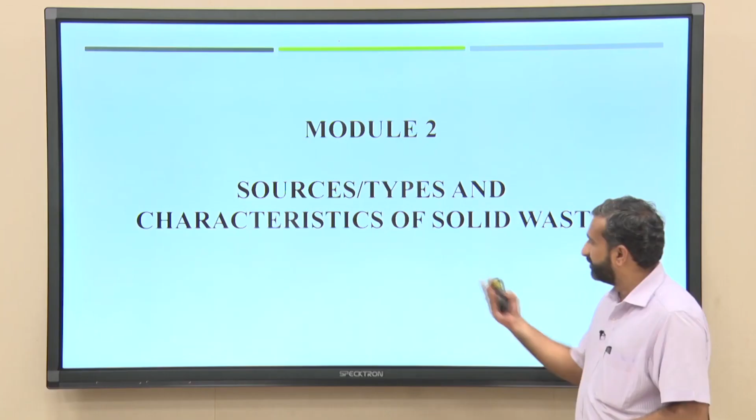So, hello students. Today we will start module 2: sources, types and characteristics of solid waste. This module will consist of 2 lectures. In the first lecture, I will talk about sources and types of solid waste. This is one of the most important topics before going for the collection and treatment, followed by disposal.

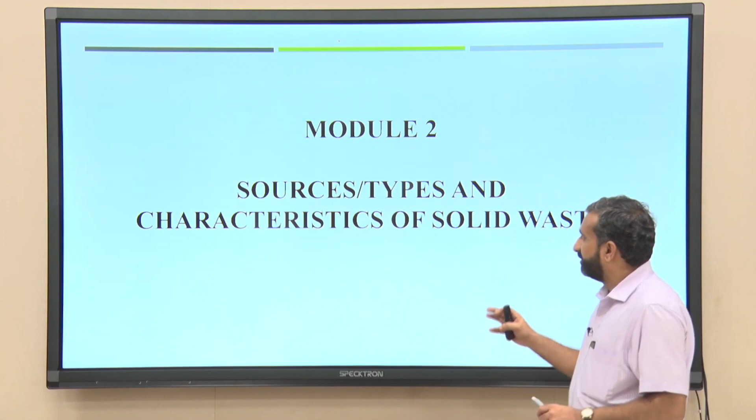And one very important one is characterization, because this characterization is very important to know what kind of treatment could be possible for the waste. And suppose you are not planning for treatment, and the entire mixed waste goes to the disposal site, what could be the issues, what kind of environmental issues like leachate production and air pollution, can be understood once you know the characteristics of the waste. So, today's lecture will go for types and sources of solid waste.

Okay. So, in this one I made it like type and source, because both the types and sources are similar. Based on the sources we can divide the different types of waste, and based on the type of waste we can also classify the different sources. So, I made it like type and sources together.

So, solid waste is broadly classified as, first, the municipal waste, which includes the garbage or food waste and whatever waste is produced inside the municipal area. That is called municipal waste, which includes food waste, garbage, construction and demolition waste, treatment plant waste, and special waste. We will go into the detail of this municipal waste, but whatever waste is produced inside the corporation or municipal area is called municipal waste. But those are solid waste only; we are not talking here about wastewater or sewage.

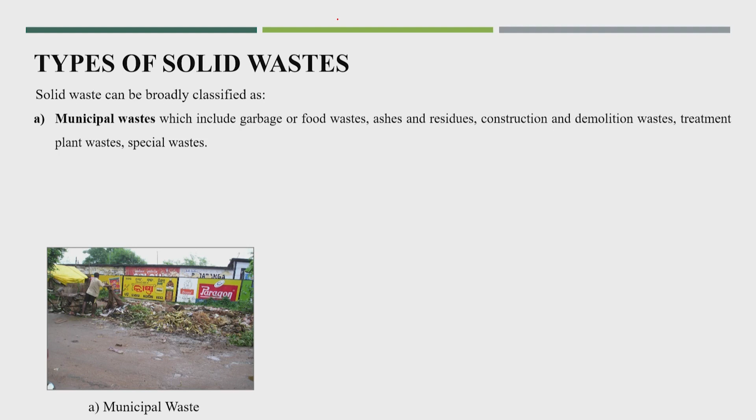So, you can see here one photograph; this is municipal waste disposed inside the city in different ways. Next is the industrial waste, which includes all kinds of liquid and solid waste generated from different kinds of industry. It is possible that some industries are inside the corporation or municipal area, but the waste generated from the industries is not directly mixed with the municipal waste, and not directly going to the municipal disposal or treatment site, because industrial waste depends on industry to industry. Some industries produce different kinds of waste, both liquid waste and solid waste.

And industry-wise, every industry has to manage the waste inside their campus; only then will the pollution control board give a proper location for industry purposes, because they have to submit the report. Every industry has to submit a report saying what kind of raw material they are using, what kind of product they are producing, and what kind of waste is generated, whether liquid waste, solid waste or air pollution, and what kind of treatment processes they will provide. Only then will they get permission to start the industry. So, this will be the different kind of waste.

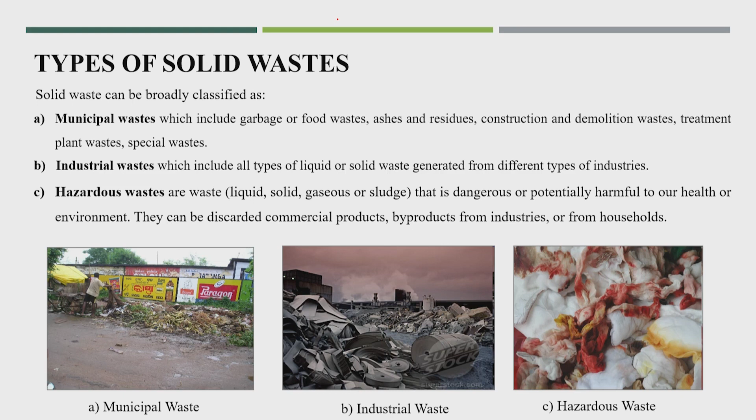And third is the hazardous waste. Hazardous waste could be liquid, solid, or in gaseous form, which is dangerous or potentially harmful to health and the environment, whether animal health or human health. Hazardous waste is collected separately. We have a special rule, the Hazardous Waste Management Rules 2016, which has been modified. So, their collection is different, transportation is different, and even the treatment and disposal methods are different.

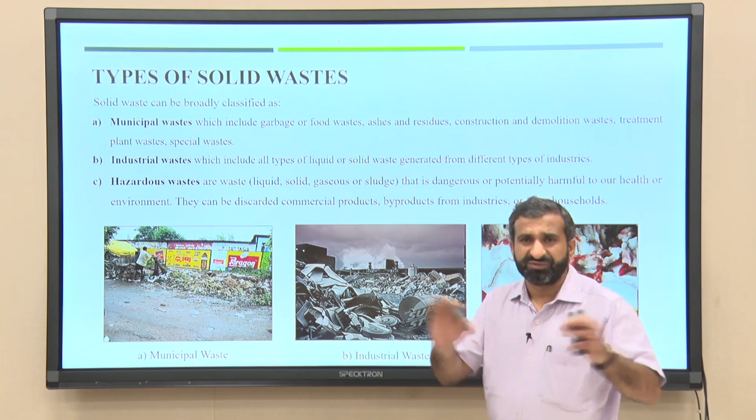So, in this course we are not talking much about industrial or hazardous waste; we are talking about municipal waste. In the next slides, we will talk only about municipal waste. This entire course is designed specially for municipal waste, which includes the different kinds of waste generated in the municipal area.

Now we will go for again the classification of municipal solid waste. It is this classification based on the sources.

The first source is residential waste, which is waste generated from household activity and consists of leftover food, paper, plastic, clothes, cardboard. This residential or household waste is majorly classified again.

Earlier the classification was organic and inorganic. Organic means biodegradable, and inorganic was known as non-biodegradable or recyclable. But there was a lot of issue to define exactly what is organic and what is inorganic.

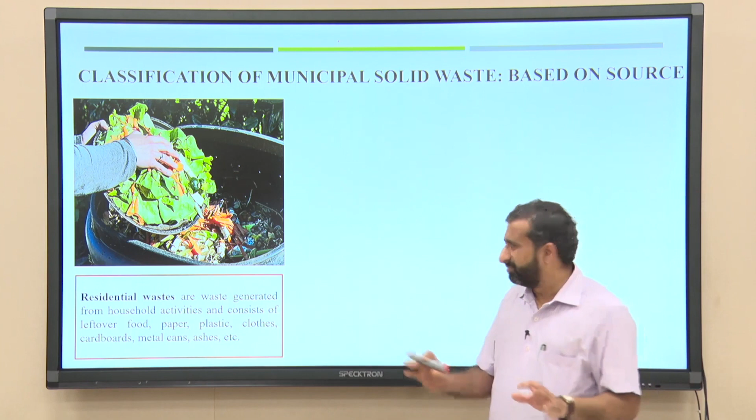So now under Swachh Bharat Mission, they made it very simple. From the residential waste, there are two types: one is dry waste, including dry material like paper, plastic, cardboard, rubber, leather, clothes, inert content, and construction and demolition waste. This dry waste does not have much moisture content.

And the other special type is wet waste, which includes cooked and uncooked waste, and such waste produced from the kitchen area, called wet waste. That is again the classification of residential waste.

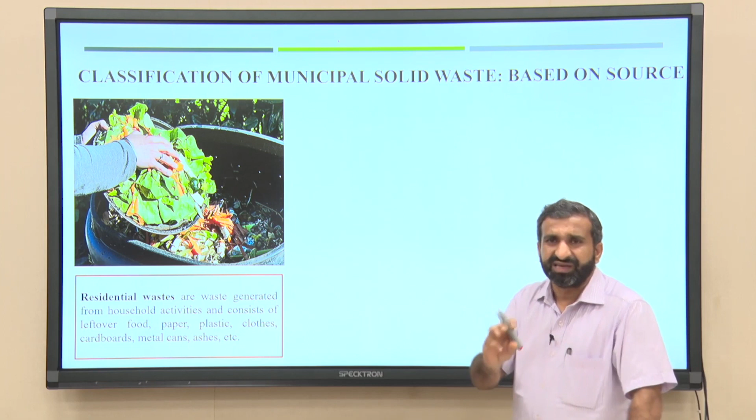One more classification is also given, which we will discuss in another lecture. But the third part is household hazardous waste, which also has to be separated in a different way.

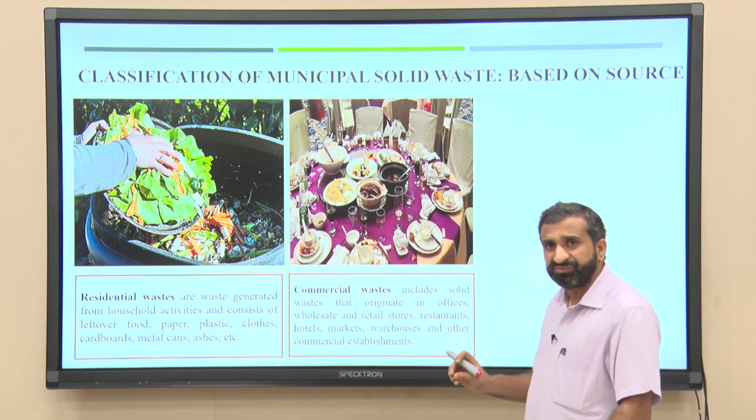Next is commercial waste. Commercial waste includes mostly dry waste, especially paper, plastic, and cardboard, which will be in larger quantity from commercial areas. Especially from hotels and restaurants, biological or wet waste gets produced. This includes hotels, restaurants, markets, warehouses, or any commercial establishment producing different types of waste.

Now, next is institutional waste. Institutions like my own IIT Guwahati, colleges or universities, or some civil areas or government buildings are also producing different kinds of waste.

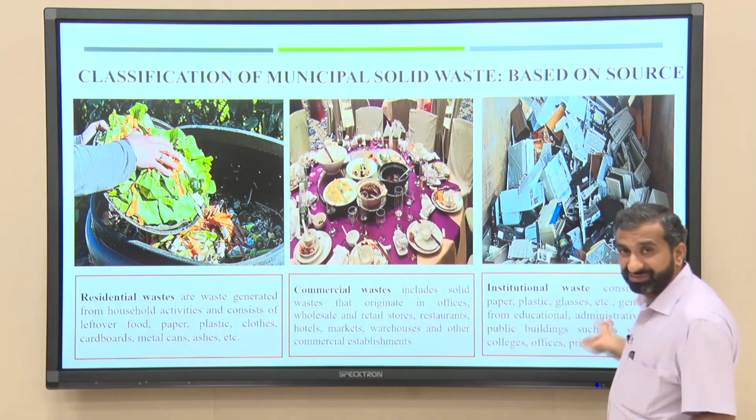This photo shows that a lot of e-waste is generated from such institutional waste, consisting of paper, plastic, glass generated from educational, administration, or public buildings such as schools, colleges, offices, prisons, and government buildings or institutions.

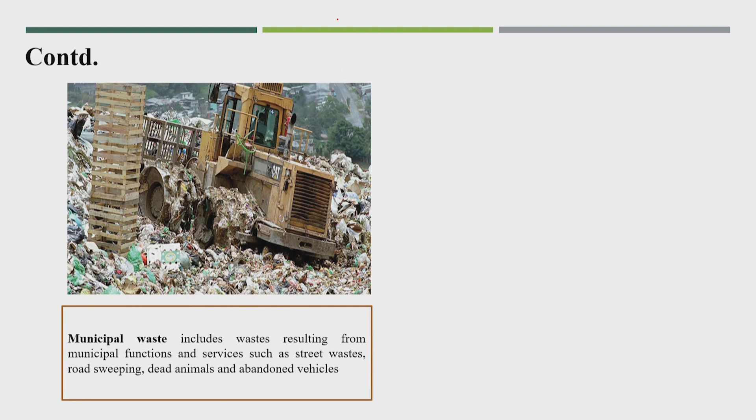Next is municipal waste. This municipal waste includes waste resulting from municipal functions and services such as street waste or road sweeping waste, dead animals, and abandoned vehicles.

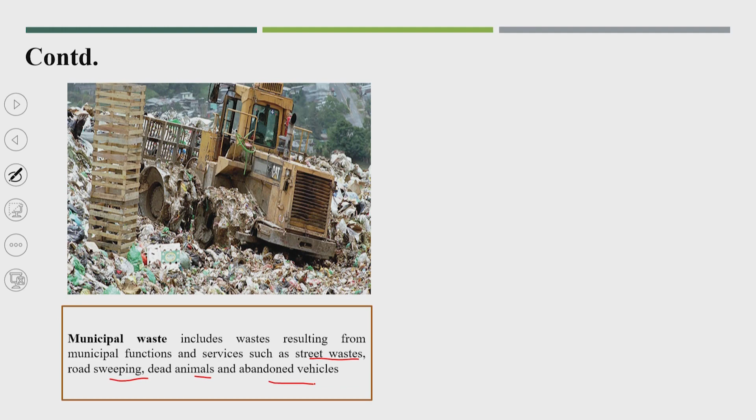This is municipal waste, and especially this waste percentage, we normally know as inert material. This road sweeping waste contains more soil and sand concentration, so obviously the weight is also very large. The density is also very high for the waste produced from that. Percentage-wise, that goes to 20 to 30% inert production itself in city areas.

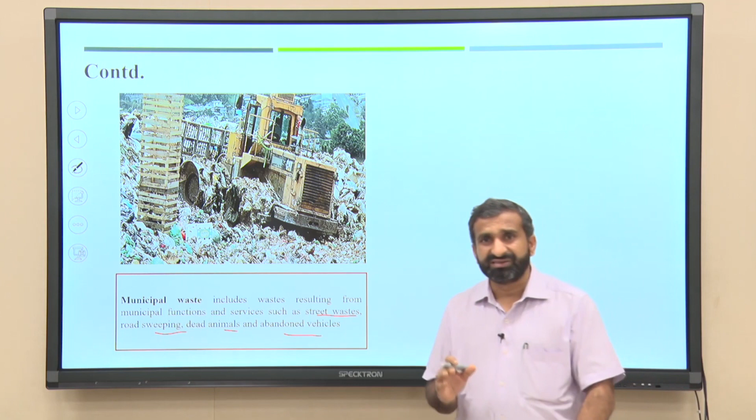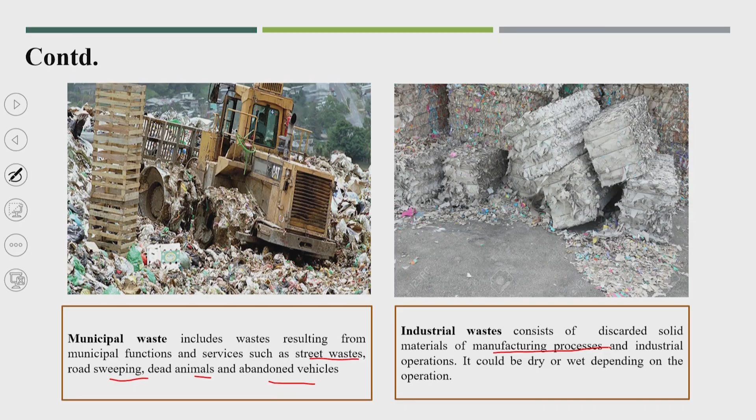Now the other one is industrial waste. Industrial waste does not typically include into municipal waste, but there could be very small industries, small manufacturing processes which discard waste from manufacturing or industrial operations, which could be dry or wet. This depends upon the local authority or the ULBs, whether such industry can dispose the waste into municipal areas or disposal sites, or go to municipal treatment facilities.

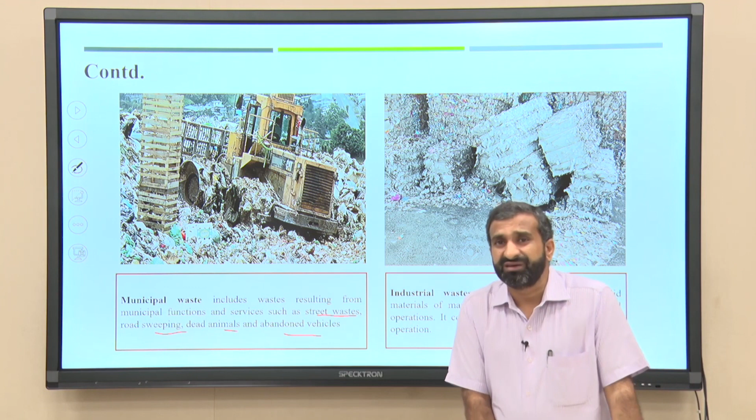Another is construction and demolition waste. India has come up with a new rule on how to manage construction and demolition waste, because a lot of construction is going on in most class 1 cities or metro cities. Because of that, a huge amount of demolition or construction waste is being produced.

Some literature says that because heavy materials are produced, like bricks or concrete materials, this is very high density material. So that percentage sometimes goes to 40 to 50% itself inside the city waste. They mainly consist of wood, steel, concrete, dirt, etc.

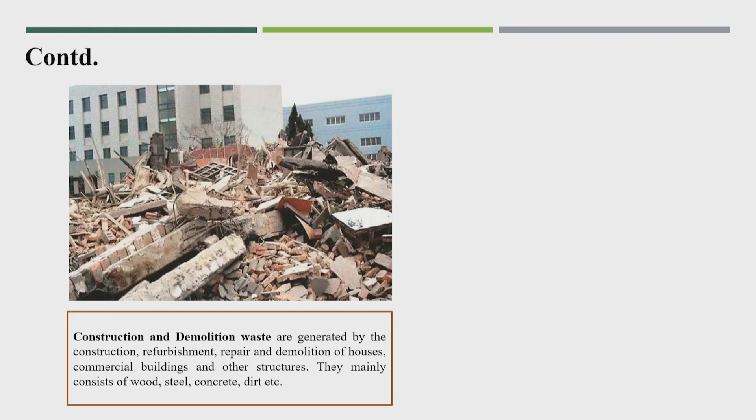Another is agriculture waste. Most agriculture areas are not under municipal area, but many people have animals in their houses, and possibly nearby some local corporation or small villages under the municipal area. These rural villages are producing agriculture waste like food grains, vegetables, agriculture remains, or some animal waste like cow dung, which gets produced in such areas.

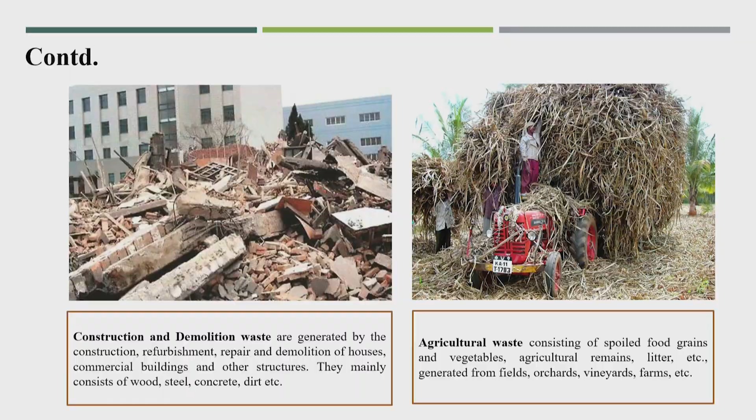So this was the different kinds of sources. Now the major understanding from this lecture is that we know the different sources of municipal solid waste.

Based on the different sources and types, we also need to understand what characteristics will come up. Before going to characteristics—which could be chemical or biological characteristics needed for the treatment process—initially we need to know whether the waste is dry waste or wet waste, because once we know this, we can easily design the primary or secondary collection facilities.

Based on that, we can design the vehicle, what kind of vehicle will be required, and once we know how much is the wet and dry waste, we can design the proper treatment facilities also. For biological waste in a developing country like India, the wet waste itself goes to more than 50%.

If you know the proper sources of that particular wet waste—mostly coming from two major locations, residential areas and commercial areas—and if you target particular restaurants or hotels, or a residential area producing a large amount of biological waste, we can easily design a proper composting facility or biological treatment facility like anaerobic digestion.